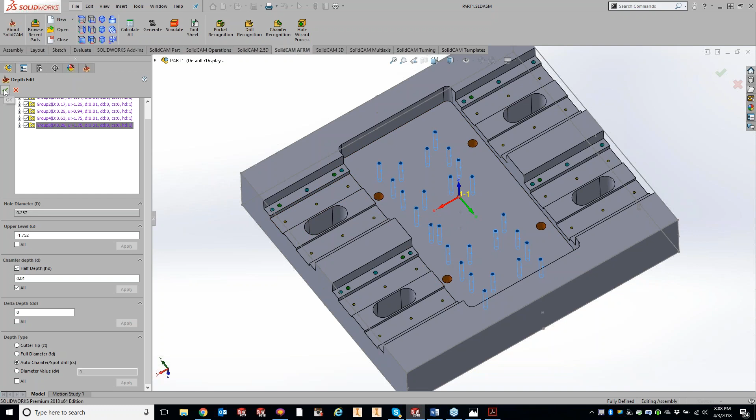So if I hit the green check mark here, technology is pretty much just like what we covered in the drilling operation. We have different orders in here - we can do the default, so how it was picked. And if you're always curious how everything was picked, we can go to geometry under the show, and it's going to show us the order.

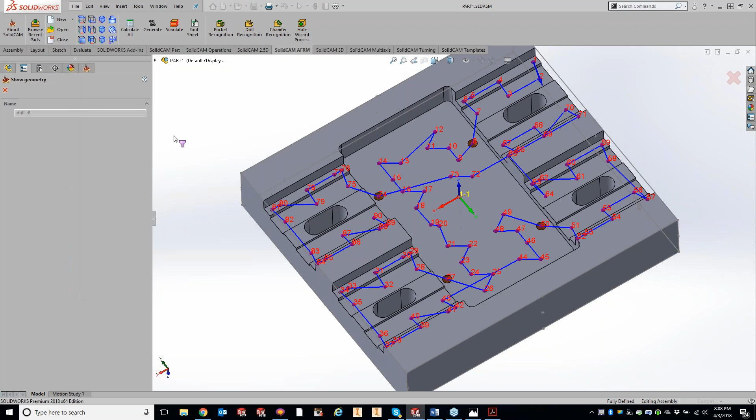Let me kind of rotate around for you guys here to show how it starts off. We're starting over on the left and working in a zigzag pattern, working our way from left to right, going in the center here and back over here. So it's kind of going pretty much everywhere at this point.

So what we can do is go to our technology, and we can do by shortest distance right here. Or if you guys are looking for a specific direction, we can also do the advance and click on here, and I can say I want to go in a linear pattern doing a zigzag, or maybe kind of an S shape.

So you have a lot of different patterns in here. If you guys are doing holes more grouped in a circular pattern, you have the circular pattern right here with a lot of different options. Really cool, and a great way to organize how you want your drill.

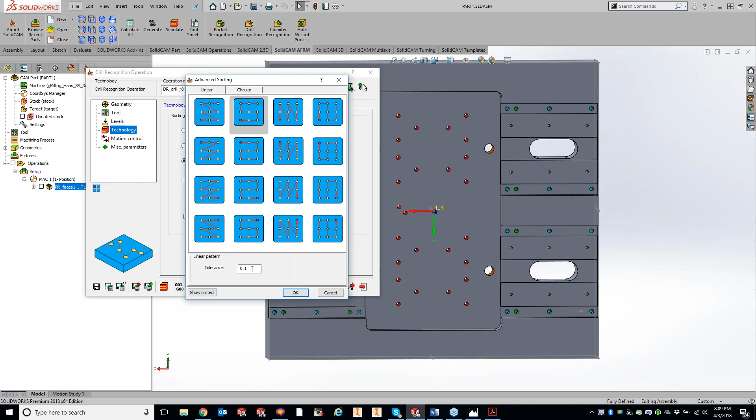So let's just stick with the S pattern for right now. And you have your tolerance right here. If you click show sorted, it's going to show you how it's going to approach it. It's just doing a zigzag pattern, working its way from the top all the way down to the bottom.

All right, so hit OK here. From right here, we can just do save and calculate, and let's take a peek and see what we've done. So do solid verify here. Let me get this rotated around for you guys.

You can see that we just spot drilled all those different holes, all different depths on different levels. This really helps you guys out on not having to pick different levels, picking certain diameter sizes. These actual holes right here in the center are going to the full diameter of that spot drill, which is a 1/2 inch spot drill.

This one's actually a 5/8 drill hole, and that's why we're seeing a basic full diameter. So we won't get a chamfer on those, but all these other small ones, we'll see a nice little 10 thou edge break on there for you.

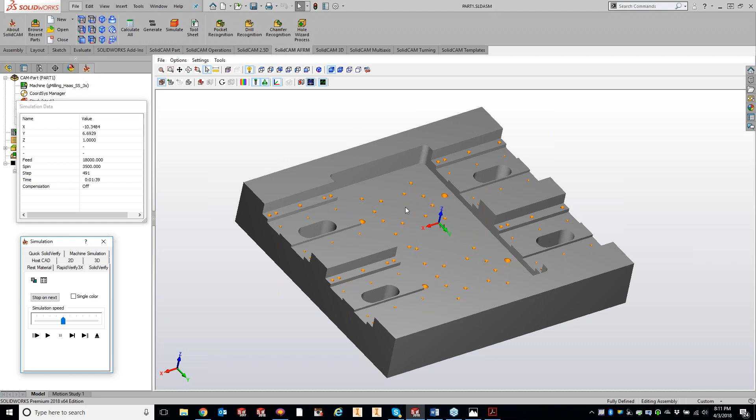Okay, so that's using the spot drill, picking your holes and doing a chamfer at the same time for you guys. So now let's go ahead and do another drill recognition.

It looks like... yep, question, Kevin, from Ben. Let's see, and the spot drill is with a smaller tip than the large? No, let me just do a select here. You're thinking the center drill, Ben. So here's the spot drill.

So it's just doing a standard radius. What you're thinking of, Ben, is the center drill where you have the smaller tip with the larger diameter that tapers up like that. So I like going with the spot drill.

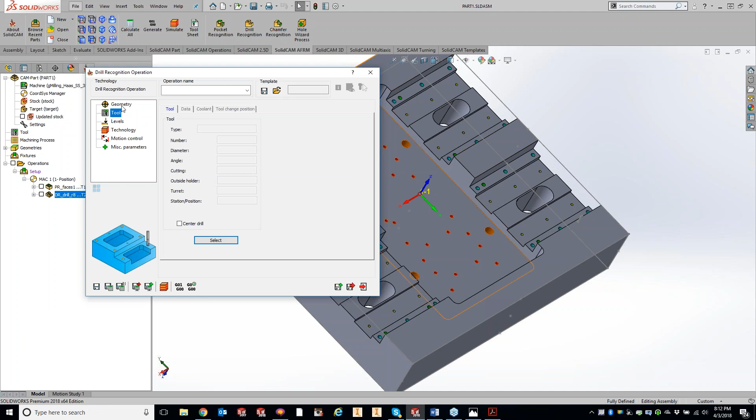Okay, yep, perfect. Okay, so now what I'm going to do is pick all my red holes. Over here, if I go to my SolidWorks, all my holes, which is my 256 holes, are all right here. I just colored these for an example, and this is something you guys definitely do not have to do, but I just want to show you different ways of going about picking the geometry for the drill recognition.

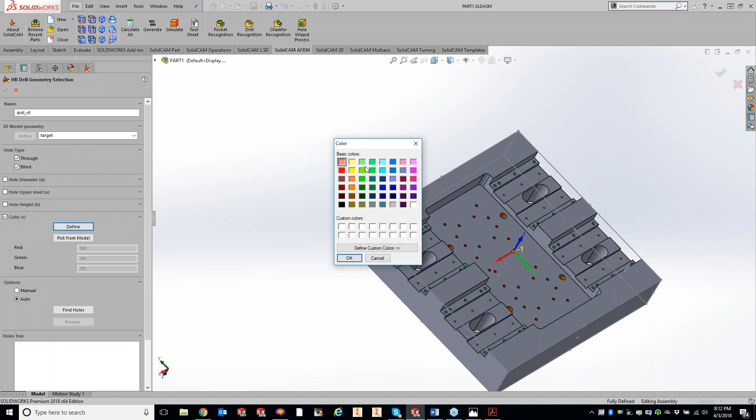So what we'll do is just click new, and I want to do by color. I'll do define, and then tell it everything that's red, hit OK, find holes, and it's going to find all my holes for me.

And you guys can also go through and see all the different holes in here. If I just click on one of these, it shows you in a light blue color what hole it is. So maybe there's a couple holes that you don't want in there. You can select, hit your control key, grab the ones you maybe don't want, and then right click and say remove. That will kind of deselect the holes for you.

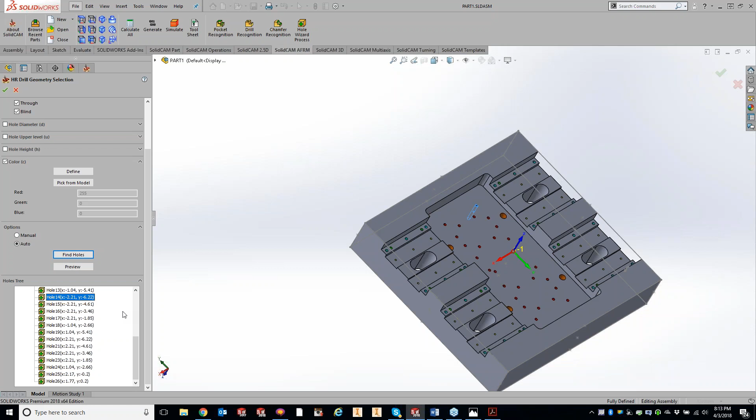All right, so we'll hit the green check mark. So I'm going to be drilling all those red 257 holes for you. So I'll go ahead and grab that drill. And not that one, 257. My levels are going to be already set up here.

Now on those ones, those are through holes. So what I'm going to do here is come over here, and I want to do it by full diameter instead of tip. And I want to go minus 25 thou, not 250 thou, 25 thou here. And I'll do checkbox all, hit apply.

So I'm not just going to go right to the bottom of that part with the tip. Oh, I thought I did full diameter. Oh, maybe I didn't do apply. There we go. So what I'm telling it to do now is to go down to the full depth using the full diameter of that drill bit, and I'm going to do an additional 25 thou pass for you. We'll hit the green check mark.

Technology. We can also, Kevin, I don't know if you saw these questions. Can you still do that with the center drill and still spot all the holes with an additional chamfer? Yes, one chamfer. So what Ben's asking is if you can do that with the center drill versus spot drill, and yes, you can.

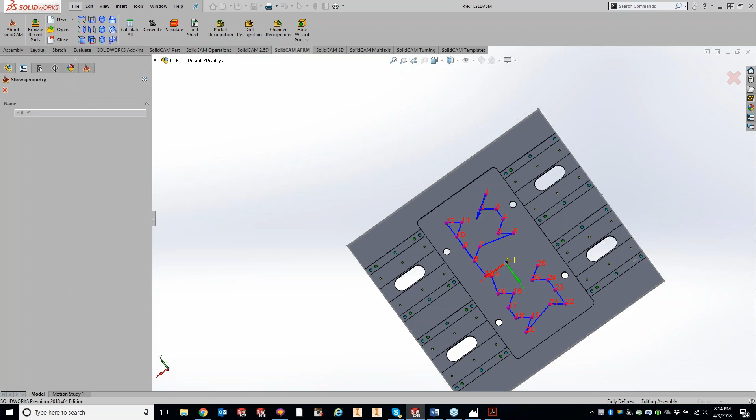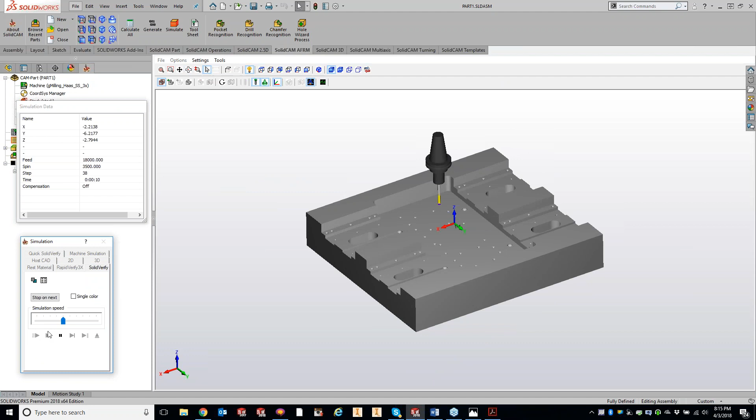So for this one, we'll just say shortest distance. Save and calculate. And since we're using a fairly small drill, I'm going to switch it over to a G83 and using a step down of 100 thou. Hit OK, save and calculate, simulate here. And we have our holes done. If I zoom in here, you'll see that we have a nice 10 thou edge break. So really cool.

All right, so let's carry on here. Let's go to our 5/8 holes.

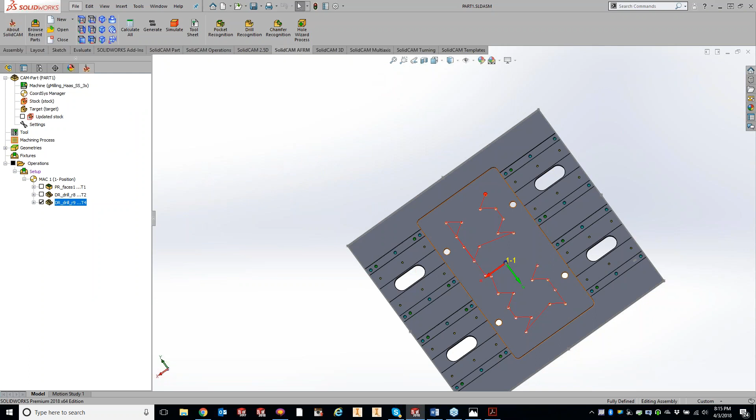So we can do our drill recognition again, and this time I'm going to show you the manual route. So if I want to just manually pick one or two or three or a couple of holes here, I can switch this over to manual. And then I can come over here and just click on the holes that I would like, and it pulls up the group for me. And if you're not sure what you've clicked before, you can do the preview option, and it's going to show you what holes have been picked and the order that it's going to go in for you.

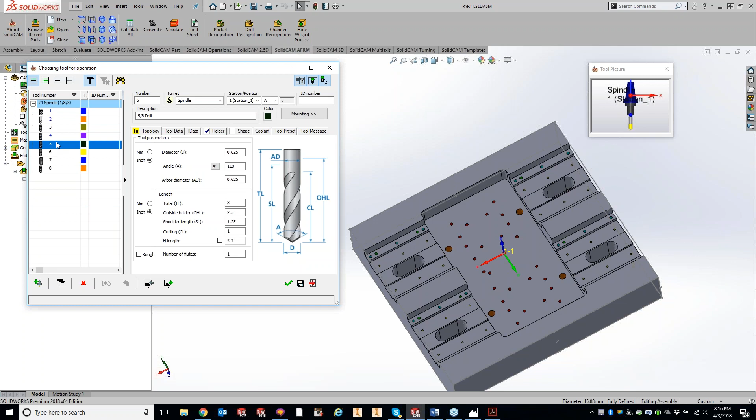So to get back, we can just hit resume, green check mark, tool select, and find my 5/8 drill, 625, perfect. Levels, and that one is a through hole also. So what I'll do is come over here, do an additional minus 0.025 to all, apply, and we'll also do full diameter, apply.

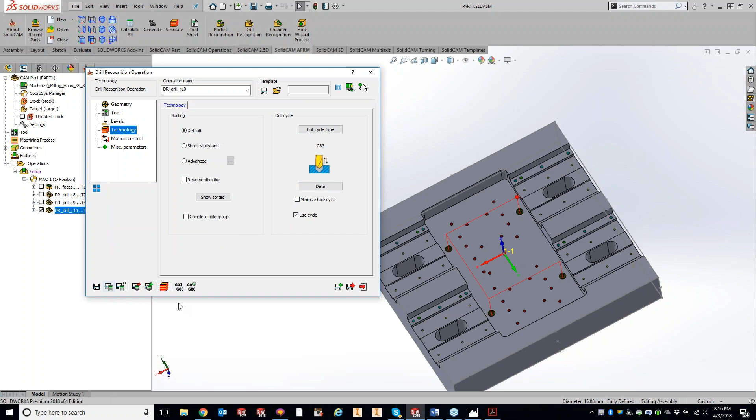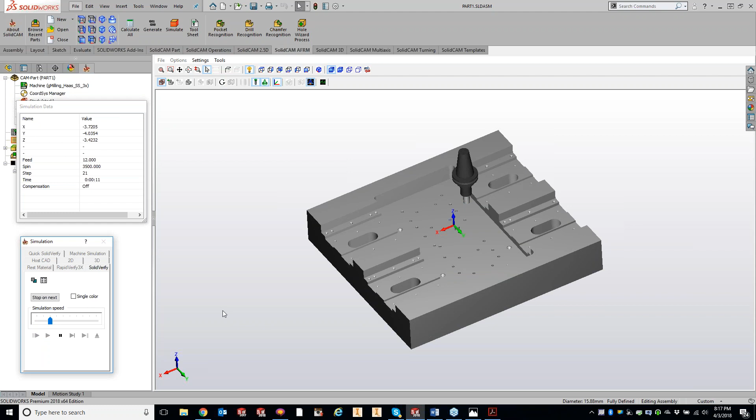And for this one, we can take a little bit healthier of a cut. So we'll just do a G83 again, and we'll do a 250 thou peck. Save and calculate, simulate here. There we go. Let me change up my settings here so we can see each individual peck. Now I know that, did that play a little fast, Andrew? There we go. So now we can see it pecking it out.

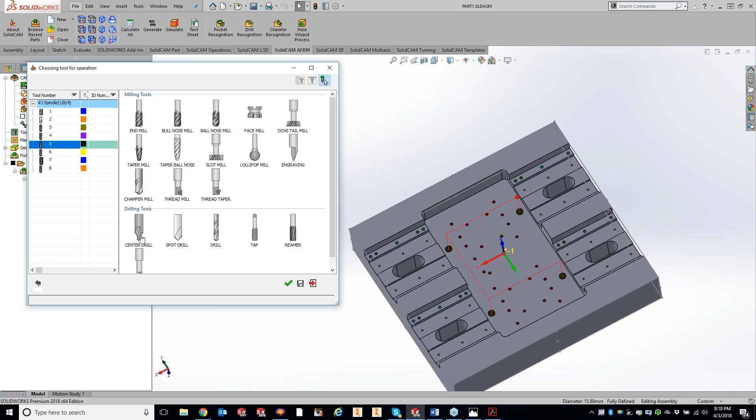Another question here. All right, what do we got? So does it recognize all the center drill diameter angles? I said spot in the previous question, but I meant center. Yeah, Ben, so what it's doing is it's calculating off of the angle of that center. And here, so it's basing it off of this chamfer up here, not the tip. So you'd have to have a center drill. Well, it will go off of kind of both, because it's going to look at the diameter here. If that diameter is too small to achieve that diameter, then it's going to move up to a little bit deeper and cut it up here for you with that angle.

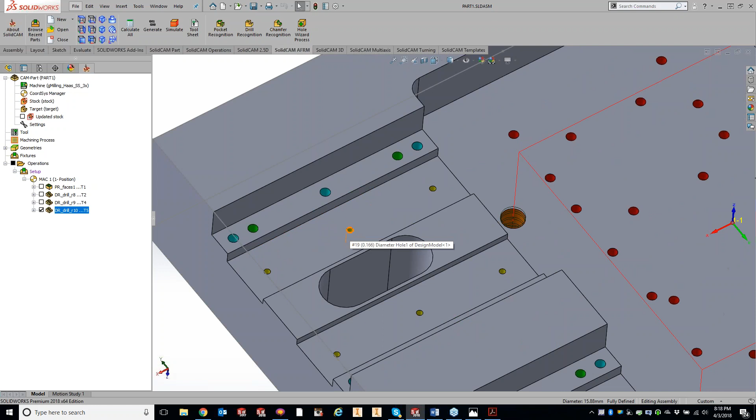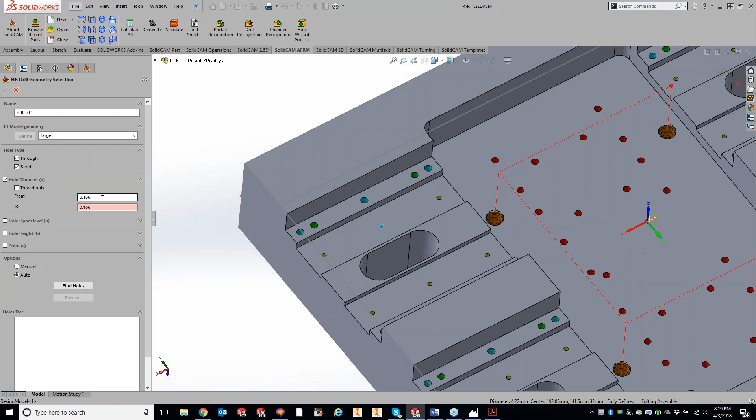Let's see, so we did the 5/8 here. So now what I'm going to do is, let's go for the yellow ones here. So let's say all these little yellow ones right here, which are number 19, 0.166 diameter holes. So we'll do another drill recognition, do new. And now what I want to do is pick just that specific diameter. So what I can do is turn on my hole diameter, and I can just highlight that number and click on one of my hole diameters. So I'm telling it to find all the holes that are from 0.166 to 0.166. So that's all the holes that I want to grab, is just the 0.166 number 19 holes. So I'll do find holes, and it found all my number 19 holes for us.

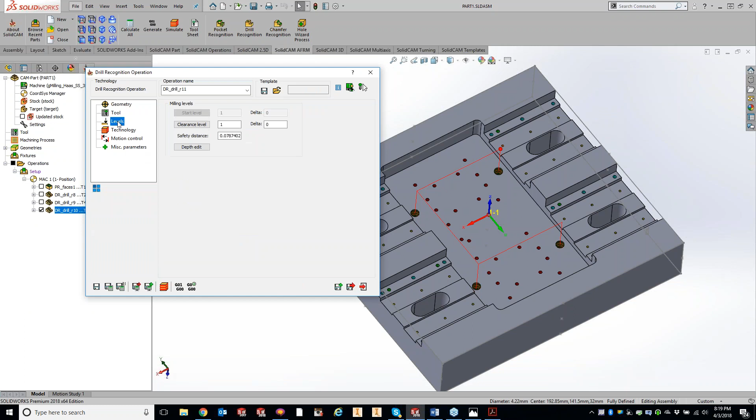Tool select, and 166, perfect, number 19. Levels, and that one is a blind hole, so I don't have to worry about the edit depth. Pretty small drill bit here, so we'll throw a small little peck on here. And let's just go for shortest distance, because there are quite a few holes there. Save and calculate, simulate, solid verify. And there we go, got our holes.

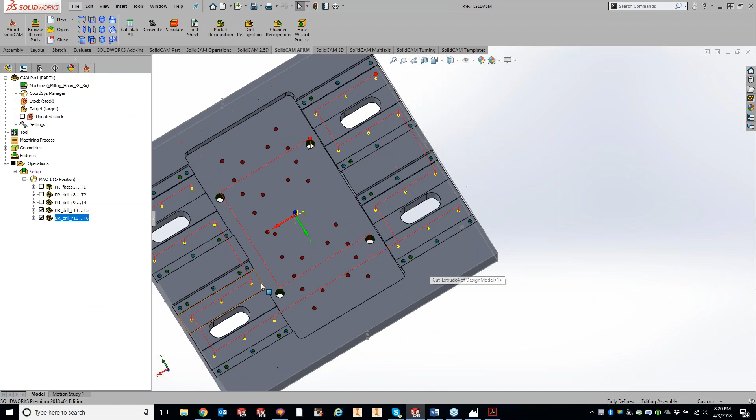So, okay, let's take a peek at another strategy we can use here. So let's see, what's this green one? Oh, the 5/16-18 tapped. Okay, so I'm going to uncheck all my previous ones here, and we'll do another drill recognition. We'll do new.

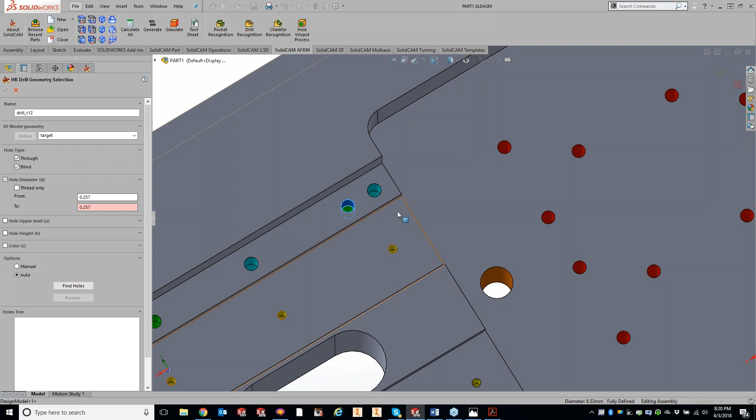So what I'll do by this one is hole diameter of the green, but you'll notice these are the exact same diameter as down here, which is a 257. So what I'm going to do is by upper level, so we'll grab all the holes that are on this level. Find holes. Now it just found all my 257 holes.

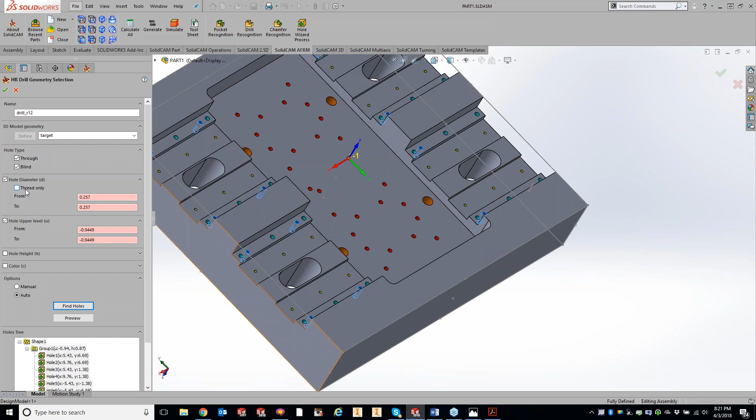You'll see that we have a thread-only option here too, and that can be checked to grab that 256 threaded hole. So it will just grab the threaded holes for you guys too. Hit the green check mark, tools, select.

So we spot drilled it, so we just need to drill it. That's going to be a 256 or 257 here. Hit the green check mark.

And those are blind, so we can just go over here and do another peck. Data, and we can take 100 thou. And we'll do shortest distance again. Save and calculate. So now what I want to do is I've spot drilled my hole.

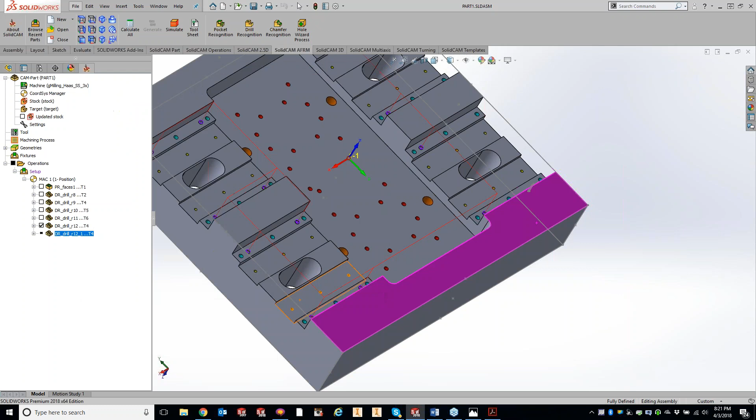I've drilled it out, now I need to come back and tap it. So there's no need to go through the same process as what we just did. What I can do now is just do the save and copy here, and the only thing I need to change out is my tool. So if I come to my tap, my 256 tap, save and hit the green check mark, and we're pulling up our tapping option right here.

But now, kind of get this into perspective here. So what we're doing is we're starting over here and drilling, come over here, drill. To save yourself a little bit of cycle time, and this is more for the production run guys, instead of having the table, when we do this one again, it's going to do a tool change, and then the table is going to move over to here and start drilling again.

Well, what I'm going to do is I can just leave it where I left off at, so the table won't have any wasted movement. So what I can do is just click the reverse direction, save and calculate, and now you'll see my start point is right where I left off with that drill bit. So you eliminate some of that movement.

I mean, we're talking very small, but if you guys are doing a lot of holes and stuff like that, or a very large part, as we know, production, all that time can add up in the end. So that is the option right there for you also.

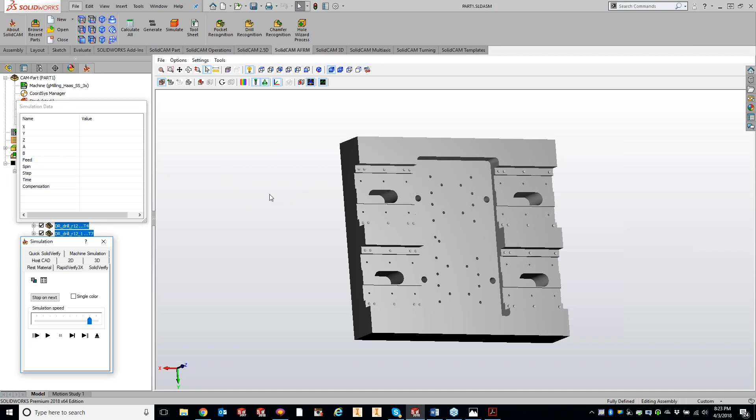Okay, so let's take a peek and let's see what we just created here. So we'll do a simulate, SolidVerify for that drill and spot, or that tap. So we're drilling, and now we just tapped it.

I might have gone a little fast for you guys here. Start over here, so drill, and now we're taking that reverse order and going back through and tapping it.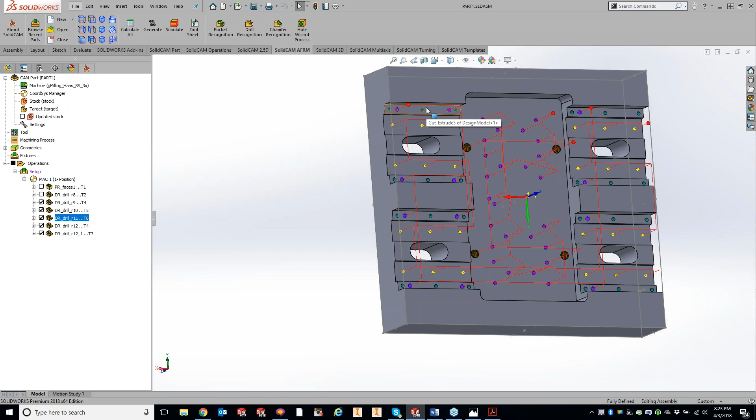All right, what other holes do we have? I'm going to turn on this tool path to see what I'm missing out on here. So our blue holes right here. So just uncheck these and do our drill recognition, do new, and we'll do by color, and we'll do pick from model.

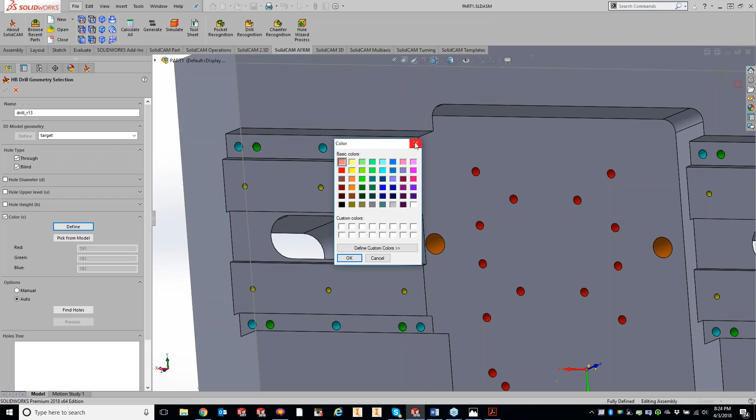So maybe you have an oddball color in there, if I do define right here, you can't find the exact color on your color chart here, but everything is thankfully set up by the engineer if you get lucky. So what I'll do is I got this kind of a funky light blue color right here, but I couldn't find it in my little rainbow tree.

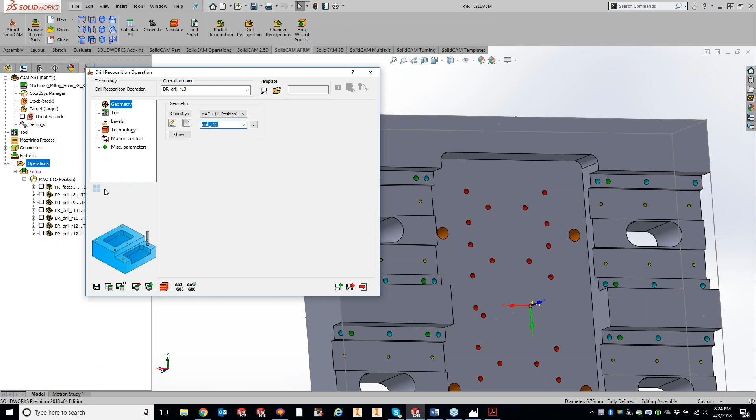So what I can do is just say pick from model, grab that, click find holes, and it's going to find all the holes that are that exact color for you. So just a different way of picking your holes. Hit the green check mark, tool, select, and what size diameter is that?

6.76 millimeters. Yep, there we go. Okay, so we got a letter H drill here. Hit the green check mark here.

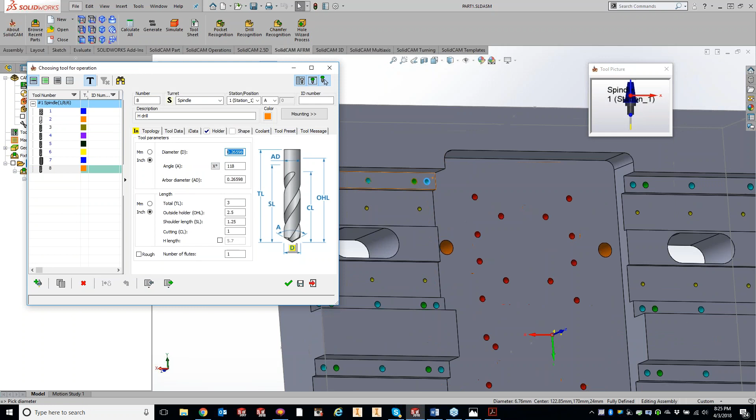And for those of you guys that don't know, let me just show you something cool too. If you guys are coming in here and adding tooling, and you're not sure on a hole diameter, what you guys can do is come over here, add your drill, highlight the diameter, and then you can come over and click on the actual model, and it's going to fill out that information for you. So if you're unsure and don't want to get the tape measure out, just highlight your diameter field right here and click on the edge, and it will auto-populate for you.

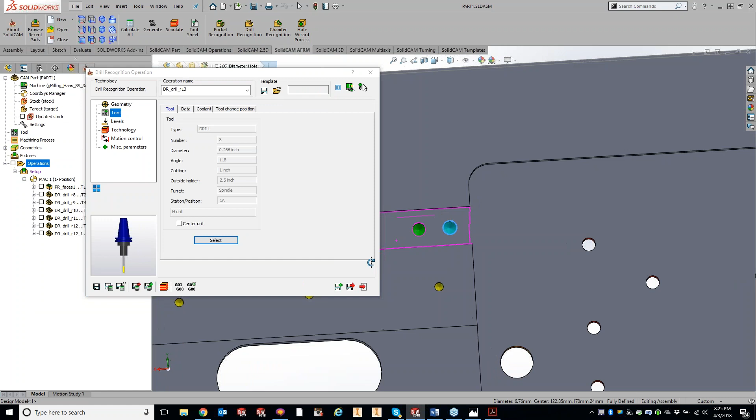All right, levels. I think that one is a blind, so we don't have to worry about our levels. Technology, it's a 250. Yeah, let's do a peck of, say, 75 thou.

75. Hit OK. Shortest distance.

Now as I'm going through this, maybe you get like - and I've said this many times - if you guys always want that shortest distance on, we can set that up as the template for you.

So anytime you guys create a new drill recognition, the shortest distance will automatically be added in there. Is there anybody in the night class tonight that does not know how to add a template and make that as your default? Feel free to speak up, because if you guys don't know, I'd gladly show you.

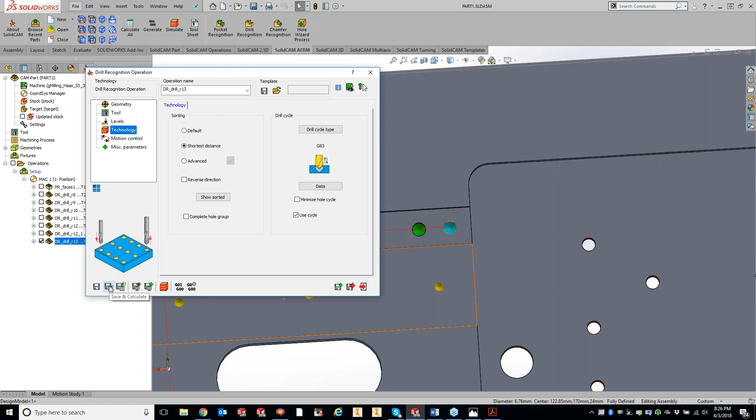I don't yet. Okay, so what we'll do - know, yep, okay. So let me save and calculate this, and as soon as I get done with this, Ben, I will address that for you.

So now we can see, grabbed our holes, we're pecking it out. Let's just do a simulation here. SolidVerify, play it through.

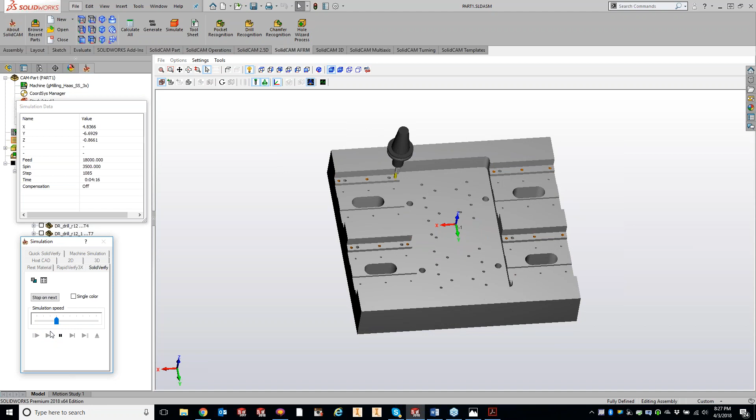Okay, so now we have all of our holes done here. So everything should be right up to size. We'll have a nice 10 thou chamfer on there for you guys in the fastest order possible. You guys don't have to worry about picking multiple different levels. Everything is kind of handled for you, kind of what it says. We're automatically recognizing the drilling geometry for you.

So picking it by size, color, shape. Well, one thing I did forget to do is you can do by through holes. So if you want to do a specific diameter, and let's say you have a couple that are through holes, a couple that are blind holes, and you just want to grab just the blind holes because maybe those are taps, you can do it by that also. So a lot of different options in there for you guys.

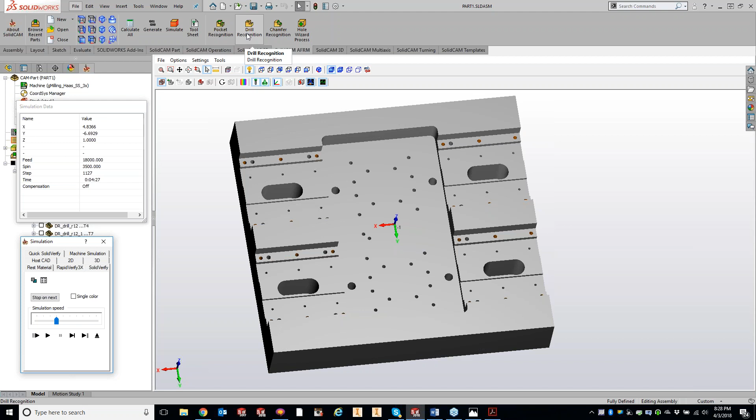Okay, so let me show you how to create a template. So what I want to do is, every time I add a drill recognition, I always want it to do shortest distance. So I'll turn that on.

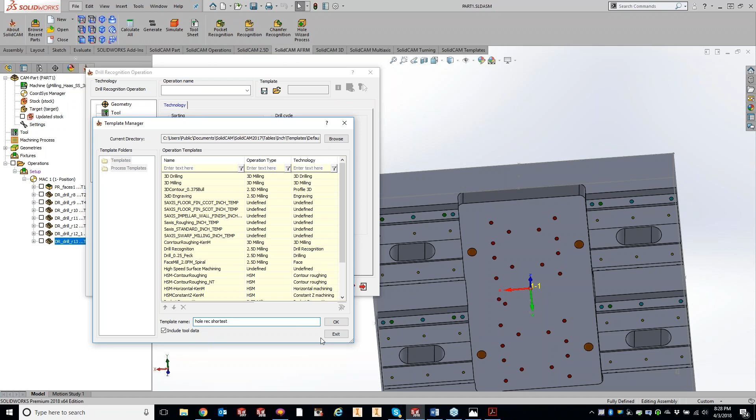I can hit save right here under the templates. So we'll say hole rec shortest. Hit OK. And now I can exit out of here.

And what I'll do is close out of the part here. Go to my tools, SolidCAM settings, and we will go to templates, and you'll see right here we have a template for drill recognition, and I have it saved somewhere else.

Where is this going? This is metric. I go to inch. I may have to...

It did not like what I picked here. This is one bad thing, because I use this computer for tech support guys too, so I have different locations set up for customer files versus night class files versus demo files, so apologize.

Thinking about it. Come on. And then we get the womp, womp, womp. All right, so let's figure out what's going on here. Sorry guys, just give me one second here. Come on, come on.

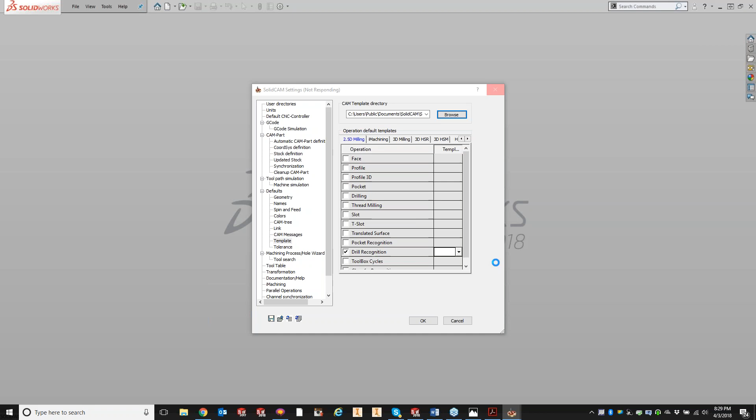Okay, I gotta see where my settings are going for that part. Recent parts. All right, so I can do it right here also. Oop, for some reason that came on my other screen. And templates - that one's going to the right one.

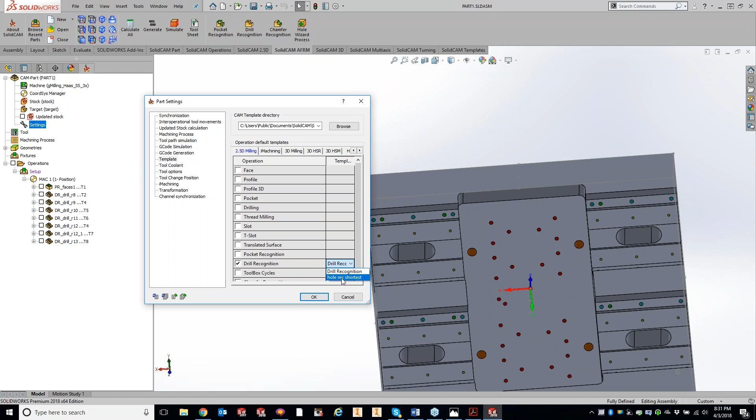So we can go to drill recognition, and we can see that I have drill recognition as one here, and I should be able to come over here and grab my hole rec shortest right here, hit OK. So now, when I create a new drill recognition operation, you'll see that it automatically loaded my template right here. And if I go to technology, it's already set to shortest distance. So real easy to use, easy to load.

Let me just see where that's going. Okay, so now if you wanted this from every new part creating going forward, then that's when we come over here and we can go to our global settings. And we'll go to templates, and I need to change the location of this. See, we're not in metric, we're in inch.

Templates, default. Okay, and now I should be able to grab my drill recognition. Oh, no, I must have that saved somewhere else. Where am I missing here? Oh, that's in 16. Delete that, go to 17. Hit OK, go back in my settings.

Now, if we go to our templates, yep. Oh man, it's going to... can't get a break tonight. Get rid of metric and go to inch.

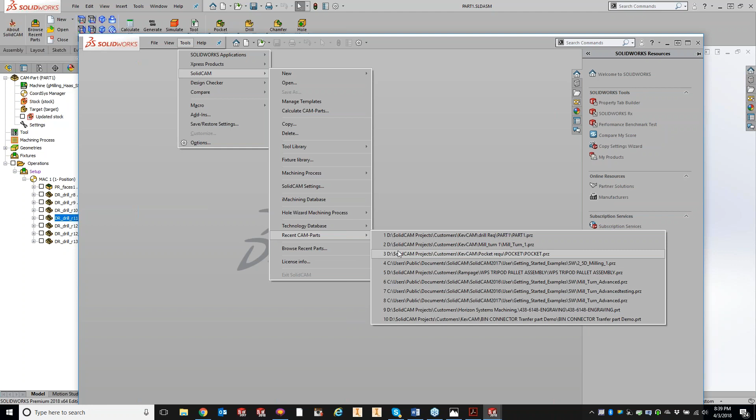This really reflects that we listen to what you guys want. Ronnie had a great idea to cover tools, SolidCAM, recent parts, and the pocket recognition we went over last week.

What we're doing right here is having 2 instances of SolidCAM and SolidWorks open at the same time. Ronnie had the great idea of this, so here's our part from last week, let me let it finish loading. Okay, so here's our pocket recognition we went over last week.

So I have 2 things of SolidWorks open at the same time. Normally I wouldn't have these on the same screen since all of us have 2, 3, 4 monitors, so you can click and drag that off to the other one.

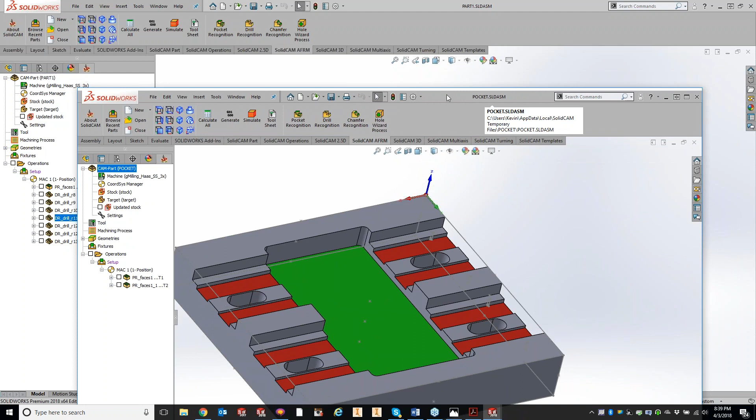But what Ronnie was asking is if we could come over here, highlight certain operations, right click, do a copy, and go to our other one and paste it into another part over here.

We actually had a meeting with Sydney and a couple of development guys Wednesday morning on this, and they are actually getting this added into SolidCAM 2018, which we're expecting you guys to have in your hands by summer. Great ideas.

We'll also be able to have the ability not just to right click, copy, and paste, but you'll actually be able to click and drag stuff over from one instance of SolidCAM to another.

Great things coming forward. Like I said guys, our slogan is leaders in integrated CAM, but I'd rather tout that it's customer-driven CAM. Definitely great ideas coming from you guys, and thanks again Ronnie for that awesome idea.

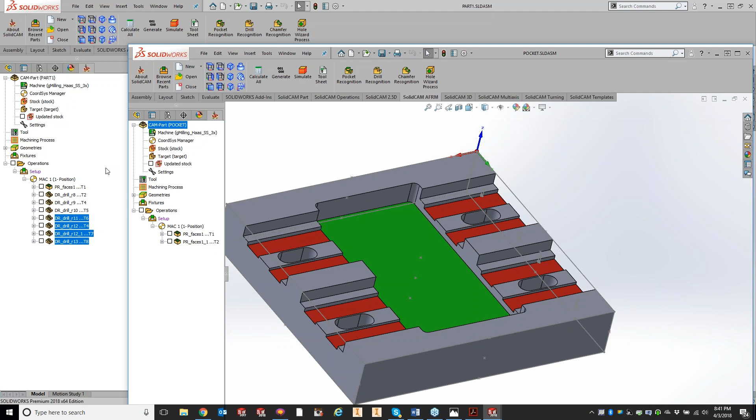Kevin, did you see the question from Joshua? Let's see, Joshua asks: is there a way to change the drill between peck and drill retract in the same hole? Yes, I think I know what you're talking about, but let me make sure.

So under the technology, under the data, maybe we just want a first peck that's larger. You can do it by reduce amount. We can do dwells in here. We can just do a standard G81 standard drill, so it's just going to do a straight drill coming right through.

I can change the parameters on the Mazak to peck 3 times and retract, but you can't just tell it to do 3 pecks and have it figure out the math for you, you just have to give it a value. So we can definitely look at adding that in there for you, Josh.

So I would assume, Josh, we could definitely add that in there. But Josh, if you could, since my brain is kind of scattered this late at night, shoot me an email on that and I'll get it submitted tomorrow morning with development to see if we can get that added in there for you. I'd definitely say that shouldn't be an issue at all.

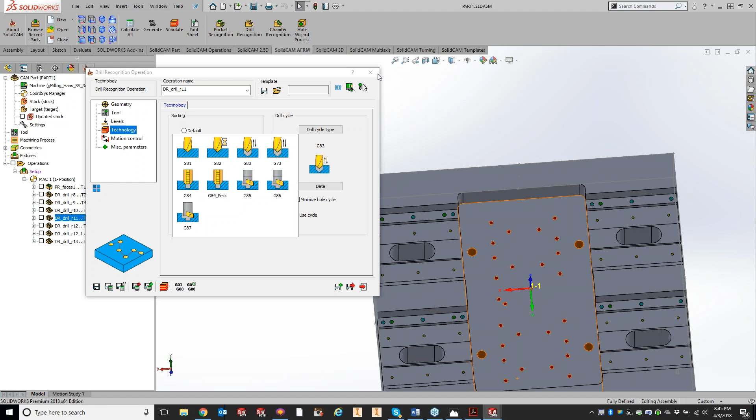Let me ask you guys this. I want to base this off of you guys more than anything, value your input. When we started the night classes, I think I just did a 2D class, let me double check real quick. I think I just did a 2D class, so we covered face mill, profile, pocket drilling, thread milling, all in one night class. Would you guys be interested in doing a night class just on face milling so we can spend more time on these? Before I get too far ahead of myself, let me take a peek here.

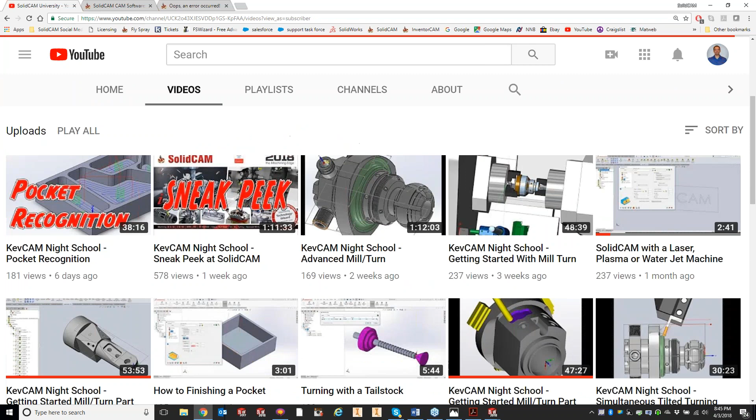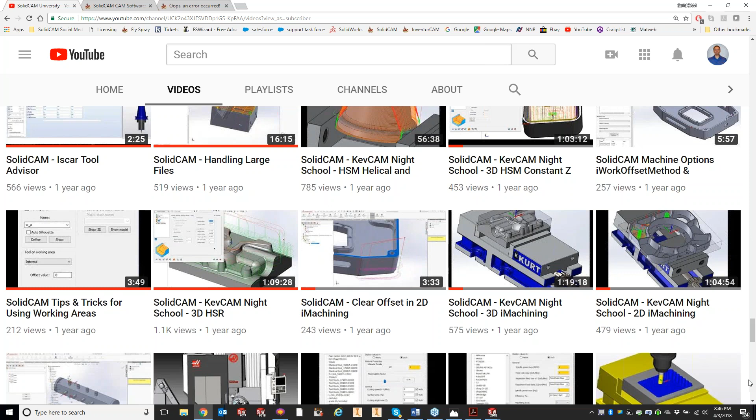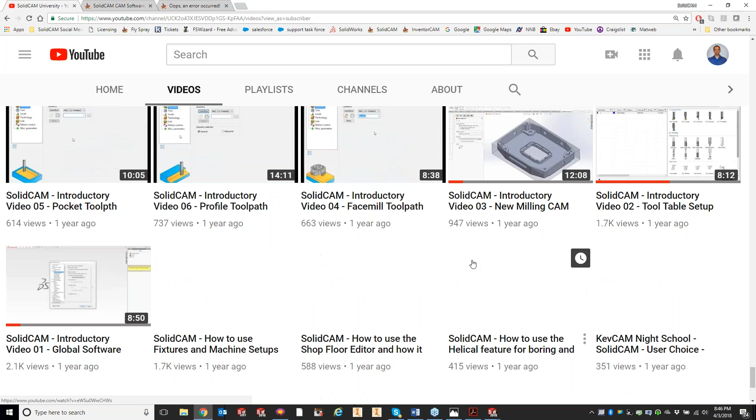If I go to videos, let me scroll through all these videos here. Yeah, see, I just did a 2.5D standard part right here, and then a 3D mill. Would there be interest in going through more in-depth with the face mill, more in-depth with profile and stuff like that?

Any takers, or do we call that portion good and understood? Anybody? In-depth is good, always important on details.

Feed my brain. Okay, so it looks like we're getting, I'll feed your brain as much as I can, Greg. So what we'll do, and I feel bad I'm kind of rambling here, going forward is we'll finish off the recognition ones. Then we'll go over your guys' suggestions. I've got a lot of great ideas from Ronnie, Ben, Greg and George to show in the night class. Once we're through those customer ones, we'll go back through these ones, but instead of trying to cram all of these into one night class, we'll do one each individually. We'll come up with a bunch of parts for you guys, showing different ways of going about those.

This is for you guys, so let me know what you want to see. But all right guys, I'm gonna let you run here.

I'm gonna go plow some snow tonight. So for those of you guys in warmer weather, think of me when I'm plowing tonight. We got a good fresh 5 inches of snow after Easter.